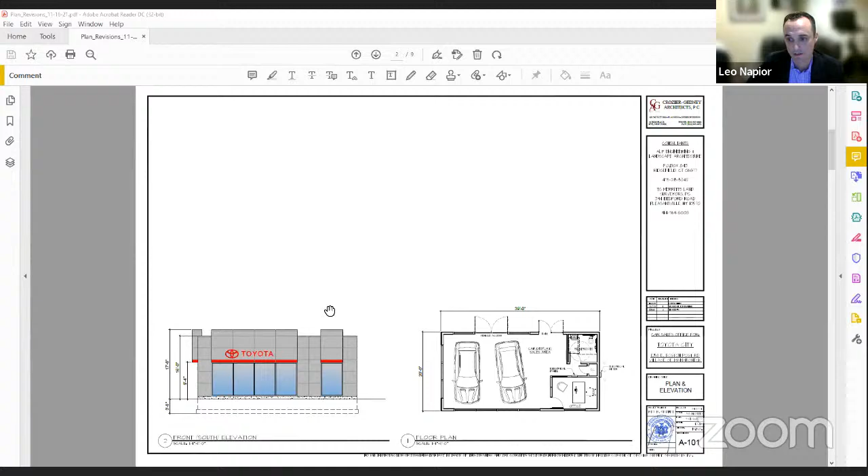So the concept for the building is to look somewhat similar to the Toyota City main facility across the street. As I mentioned on the site plan, the utility connections were shown. The customer parking spaces would be designated here. We also provided details on the hours of operation, which would be 9 to 6 Monday to Saturday, and 11 to 5 on Sundays.

And I think the final piece the board had a question on, which I wasn't able to get more details for, was on the light fixtures themselves. The idea would be to have similar fixtures to those in use across the street at the main Toyota facility lot, and they would be on photo cells, so essentially they go on at dusk and off at dawn. I think that was all the questions the board had. I'm happy to address any further questions.

Now, the cars here, this will be mostly used cars, is that correct? It will be a mix of new and used, yes, there will be a combination of the two. Will you be doing any leasing, contracts, leasing of cars on the lot? Yes, I mean, I would imagine, I haven't had that conversation, but I would imagine it would be both sales and leasing. That's fairly typical.

Yeah, that's a permitted use. It's actually the way the code describes motor dealerships, it's buying, selling, but renting of cars. So we would have to say that you also have, are these renting or are these more leasing? What's the difference between renting and leasing? Renting implies a short-term, daily, weekly, possibly monthly. Leasing would be over usually a period of one year to three years. I'd say a lease is a rental contract with an option to purchase at the end, so it almost, in a way, is a sales contract with the trade-in value. Yeah, I don't have a problem with that, I just wanted to call out that you would be doing leasing.

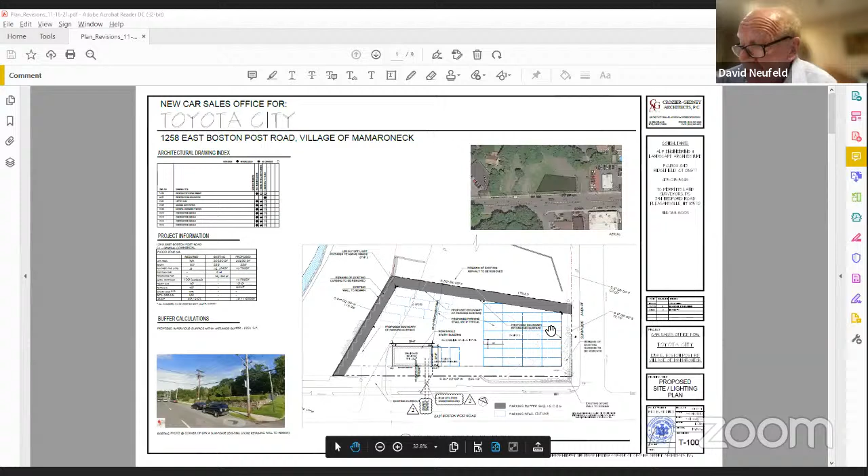Yeah, I see that, I have the plan. What about on the Post Road side? There's a retaining wall there, so there's the lot wall. It's elevated, and I can just flip.

There's going to be some significant plant material based on the village's planning landscape consultant. They had comments about adding in some street trees, so we have those proposed along the street here. There will be a curb installed between what's essentially the upland of the other lot, lower down here, and then there would be new curbing and new plant material planted along the back edge.

This is all entirely flat right now. The existing rubble asphalt extends out into this residential lot, so we're cutting ourselves off from that residential lot. Right, where you have the pointer now, that's going to be like a 2-foot grassy swale, I think you said?

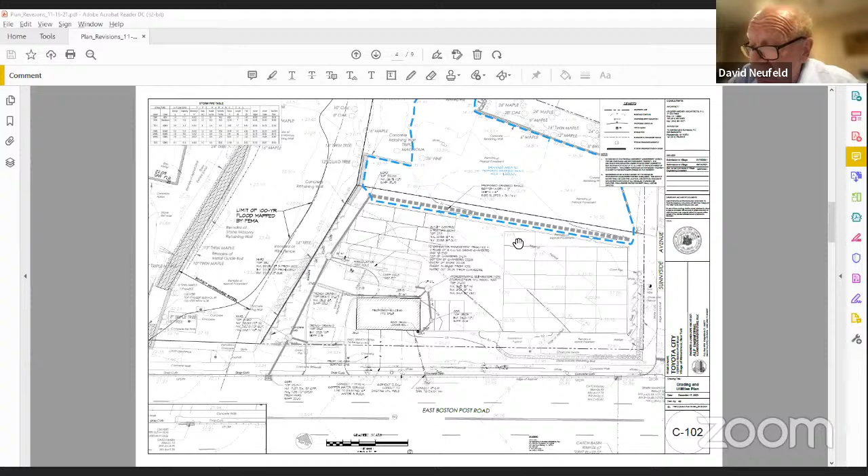Yes. Okay, but the problem I see then is if you're going to make those 7 spots for customer parking, how are you going to get the other cars in or out and move them about? Well, so there would have to be some car jockeying.

I could be wrong, and I'm sure the applicant hopes I'm wrong, but I would think it would be very unlikely that all 10 of these spaces, given the small size of the lot and the small size of the building, would be occupied that often. But that would be no different than if there were no customers parked here—if every one of these 10 spots was full of a car and they needed to get one out, they'd have to move the cars around it.

Unless you could put those 7 spots behind another location, like behind the 2 that you have, coming in this way—because what I'm saying is you're going to have a problem. Your storage area there, basically the only way it can get in or out would be using the Sunnyside Avenue cut.

Sunnyside is not meant to be an active curb cut. There's an existing curb cut there now that's going to be gated and closed off, and actually planted over. It's being left there simply because we're the tenant on the property, not the owner. So to the extent the owner at some point wants to do anything with the adjacent lot, and they already have an existing curb cut there, we just didn't want to touch it. But the intent is to have that as emergency access only.

Well, is there a reason you can't go behind the building, a little where you are now—you have those 2, and do the other ones, the 7, vertically or horizontally coming in there, and that lets you... go back to the 2 that you have now. You're saying stack them up here? No, to the right—there you go.

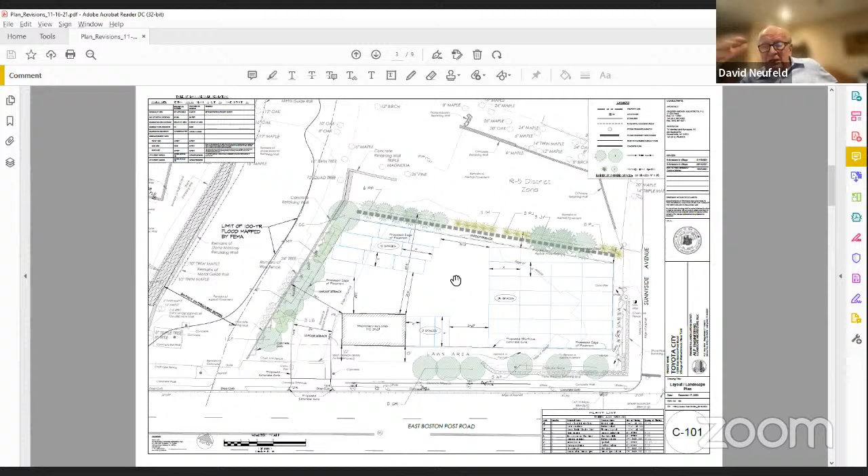Can't be both, right? So I don't necessarily have an issue with them being considered together, other than obviously it costs the applicant a month.

I guess the only question is, am I opening up - I'm not aware, I don't want to start talking about operations on the other properties and driveway layouts and parking layouts that have already been, in theory, permitted and approved and in operation for some time. I just don't want to open up a whole can of worms that sends me down a rabbit hole. I don't think you need a site plan review for an extension of the business, you'd need a site plan for new construction.

The problem you might be opening up, candidly, is that the other side seems to have taken the parking area and is using it now for storage of vehicles. I've been there on occasion, took my kids there in the past, and always had to park somewhere down the street on the Boston Post Road. But I noticed the parking lot now - I don't know, but you may want to think about this.

Obviously, if it all complies, it would be very easy to amend it. It would give you more flexibility for operations. I have a problem conceptually with the idea of treating it separately - I have no problem with that, but treating it separately when it's not separate. I think it's fair to say it's probably not going to operate separately because of the interplay between them. I don't know what other members of the board feel.

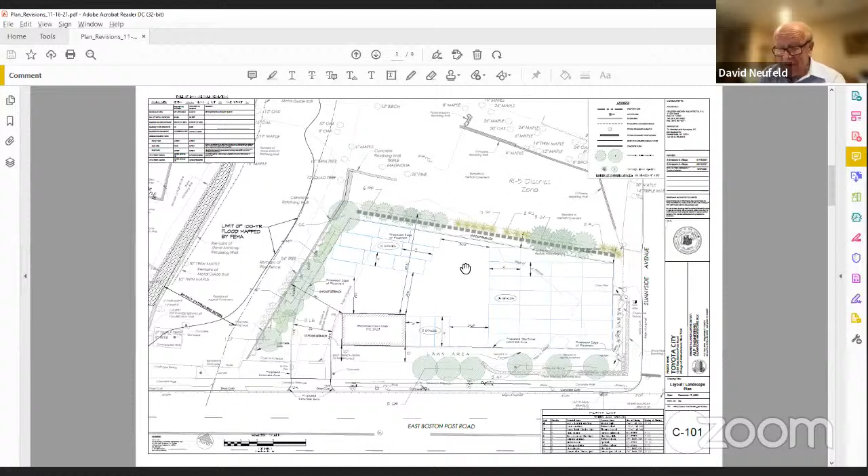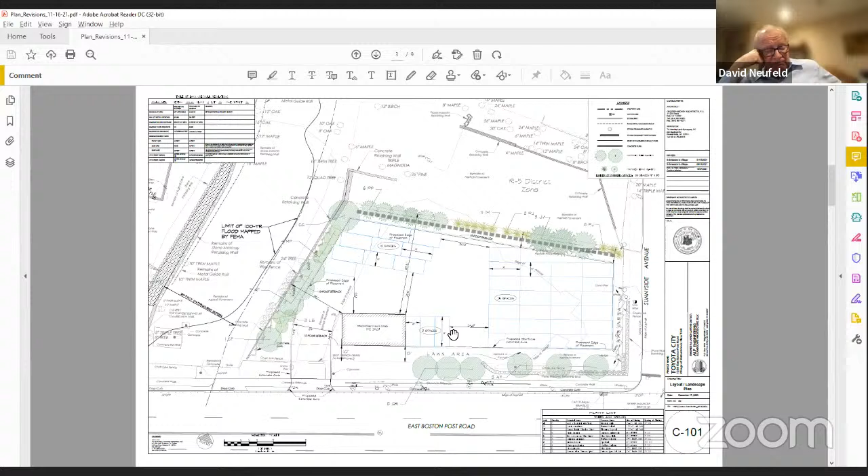I see a special permit for 2015 for 3 years, so it would have expired sometime in 2018. We could look it up and find it. One of the things we can do is let the applicant take a look at it and make a decision, and come back.

How do members feel about that? I think that makes sense. I agree. Otherwise we're just sort of throwing it against the wall. I don't know, otherwise we're sort of disregarding what the code actually says.

Sorry, somebody's rubbing a mic someplace. Otherwise we're disregarding the code. We know they're not going to comply with the code. There's going to be an interplay. It doesn't seem like such a big deal. Do we really want to do that or not?

Chair, board, that's the question I was asking earlier. Looking at this application, I don't see if it's together, apart, or a satellite — if they're purchasing used vehicles on one side of the street and selling at this other business that belongs to them as well. Are both of these agencies sharing the same name? Is it Toyota City as well, or Toyota City A and B? Is there a difference in the name of the business? There's a lot of questions that I have.

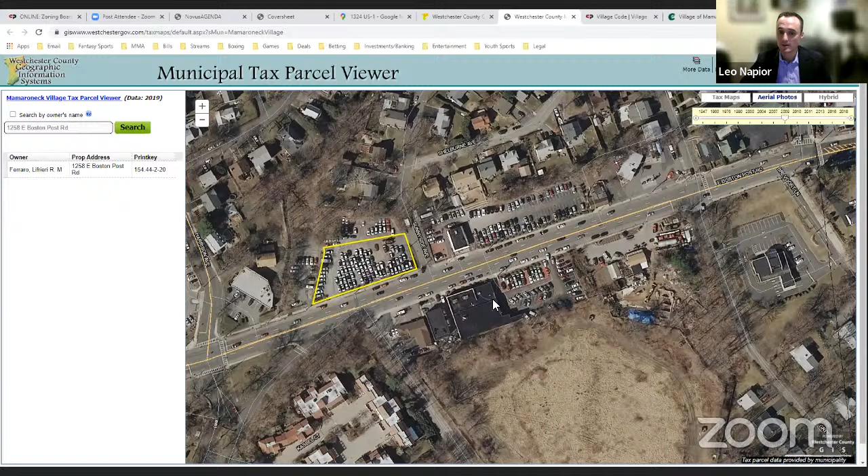It was being used for vehicle storage at that time. I realize that, and there was an issue with that, but I'm saying, did it ever get legalized or a permit issued there? No, that's why we're here before you now. It was used this way for years up until they came in to ask for the showroom permits, and at that point in time, it was realized.

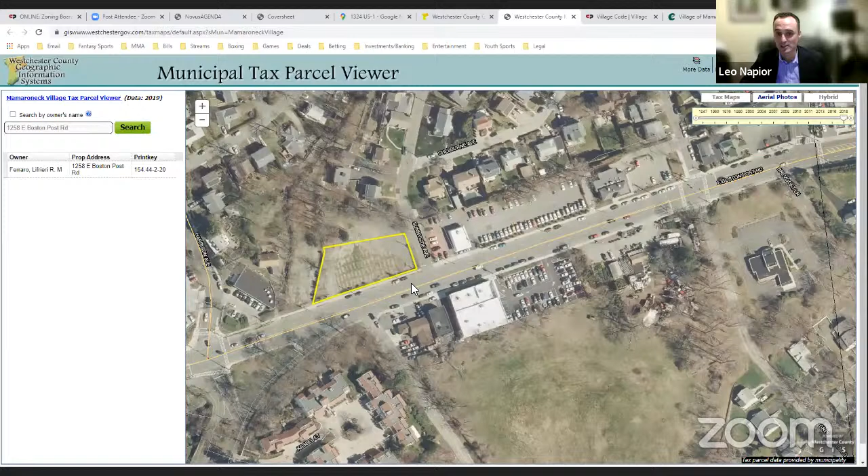It's now empty, Dave. It's not this way anymore. There's no cars on it. Yes, this is it today. Okay. Or in 2018, but also today.

My question was regarding the lot which currently does have a building and cars on it, acting as a car sales agency. Just, I don't know what direction that is, but it's on the same side of the street. It's where the pointer is now. And does that have a special permit?

Brittany, you couldn't find that one, right? All right, so my suggestion is, I don't know what the board feels, let's all talk about it for a second. I think this is, you got a compliance and a sprawl issue here, and the issue is, what do they want, and then how do we make it so that it gets corrected properly? Because by doing this separately, it's becoming more and more complicated.

So right now, the two lots that are in operation now, are cars crossed over, or used cars from one lot brought over to the other lot, or vice versa? Do you know? I'm not aware. I do know just from the signage on the building, there's arrows that say new cars this way, used cars this way, but aside from that, I'm not sure how the two interrelate.

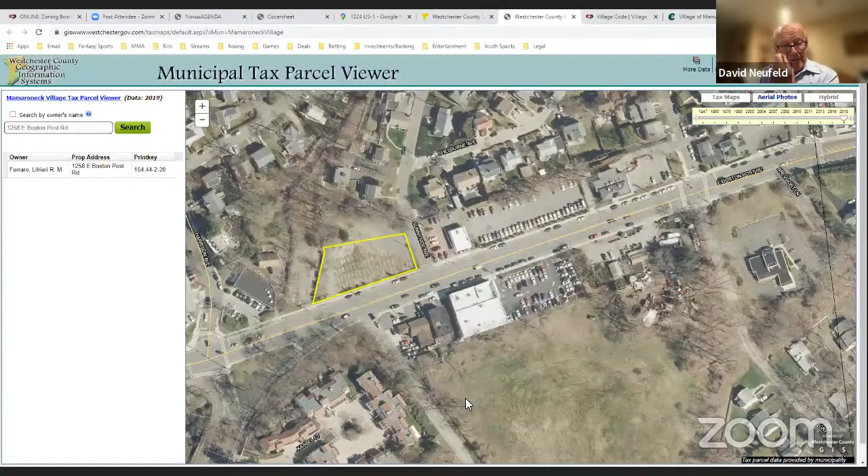I think at least I would favor the idea that this has all got to be properly made compliant so that, and I think you're operating them together, and I think you've just got to get that dealt with properly so that everything has the appropriate permits.

All right, everyone else want to put this off then? Anyone object? Ron, Meg? Okay, Greta? All right, so we'll put this on for January. We'll carry it forward. Why don't you try to move? I know it's a tough month to move forward on these things, but if you could try to do it, and maybe Charlie, if you could follow with them, or if they have any questions, they can ask you. But it would be nice to be able to get this organized because they want to move on it quickly.

And then the next matter, my paper's at 533 Claflin Avenue, the continued public hearing on that.

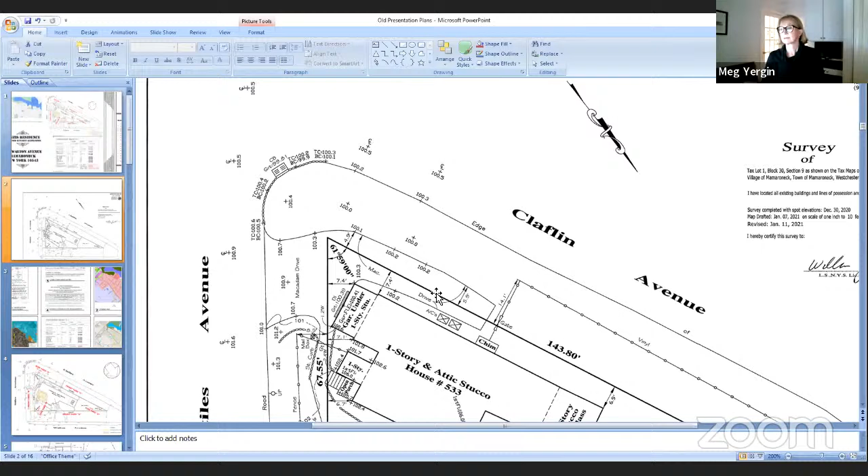And that's where you can see the stair is literally encroaching onto the right of way. So our proposal is to bring that stair around into the front yard, back onto the property. Okay, can you show us the site plan with the new proposal?

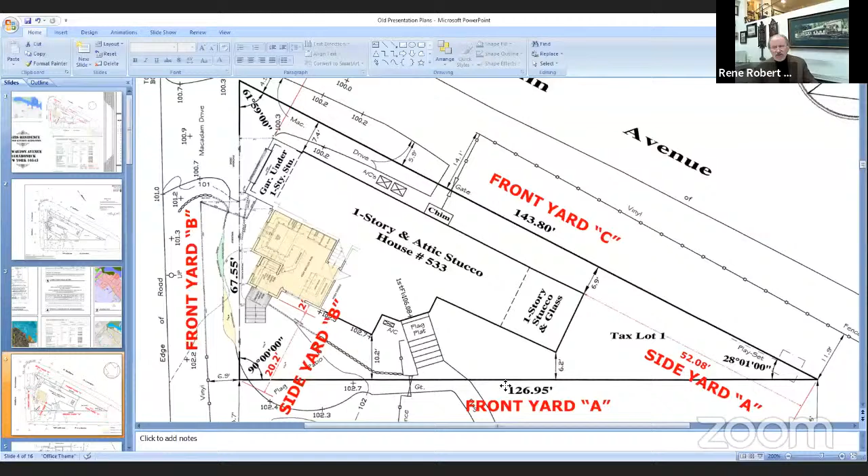Right here, you see that? Is your property line ending over there on that edge? That's the property line here and here. What's the rectangle, what's the other part where it says front yard B? Directly under the front yard? Isn't that your property as well, the 67.55 by... I'm looking at something that I picked up, and it has front yard and side yard, but I'm looking at something here that says...

This is the old drawing version. Yeah, that's the old version - he was showing us the old drawing. The new version is this one here. Here you see the new version. Okay, now we can't see it again. Click back to the new version. If you go back to the old one, we'll disregard what you called forward, front and side, and we can just look at where the stairs were placed.

Okay, let's go to the old version here. Can you see that? No. There you go, we go. Okay so...

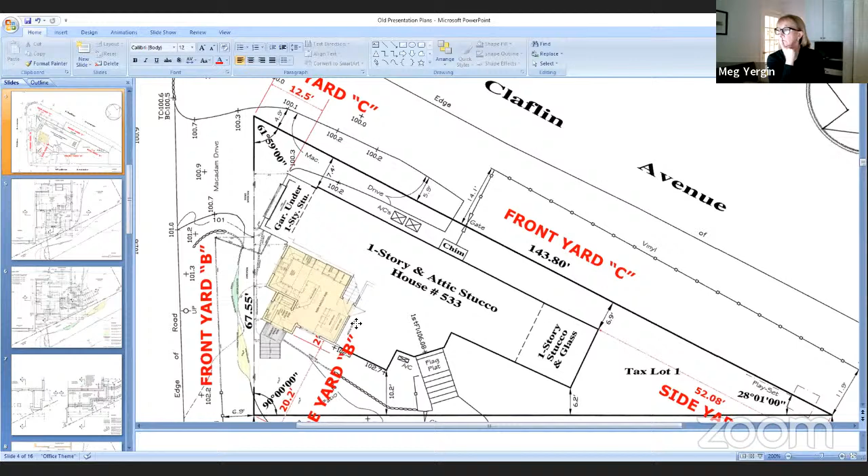Front yard B is now side yard B - the front yard C here and the front yard B, these are where the front yard is at. That's where we defined this stair in our new amended definition, considering this the front yard and this the side yard. Listen, they pulled the staircase off of the property line and put it in the front yard - from here it's currently running this way, yes.

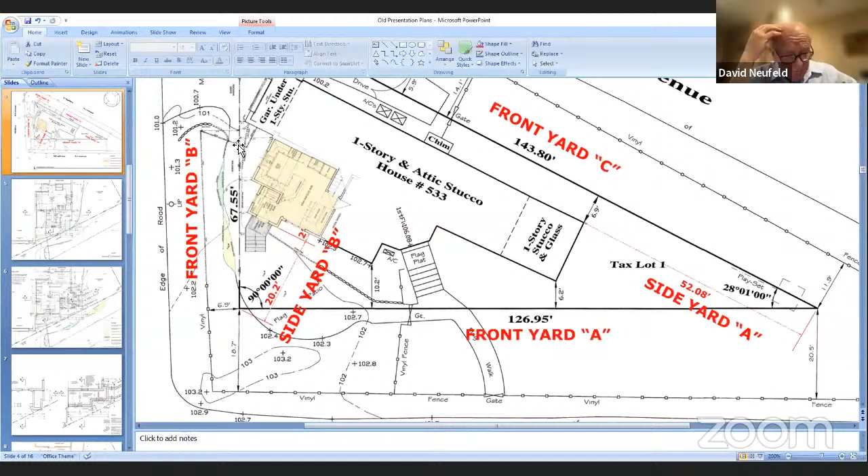Where is the fence though? There's a fence on that side of the street. Yeah, the fence is here. So what I'm saying is you really have that property - I mean, I don't know your deed or your title, but you've effectively gone out into that area. That's currently the case. And what makes you think that you don't own that area?

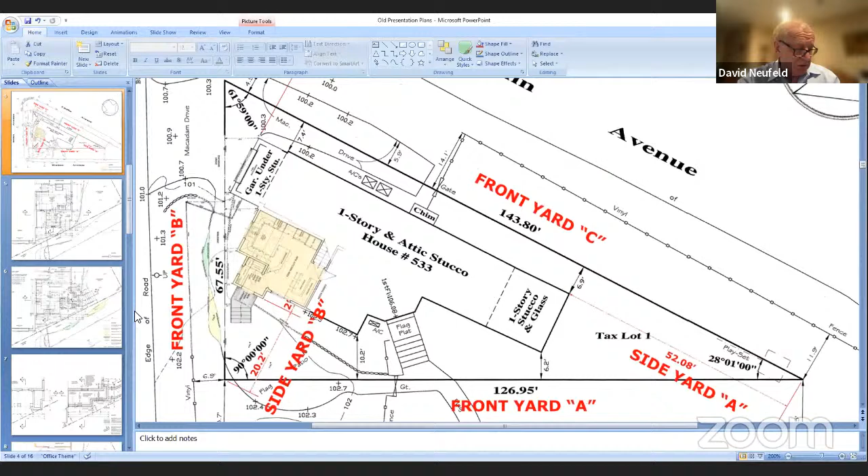Do we have a survey here? That's the survey plan. No, I don't think that's a stamped survey - this is a proposed site plan with yard designations. There's nothing here that says this is a survey, there's no surveyor seal. I can bring you back to the survey, let me try that. Thank you. Fingers crossed, we're gonna get to see it. Yeah, because the land that's outside where they walk, where the steps went onto, was inside the fenced area.

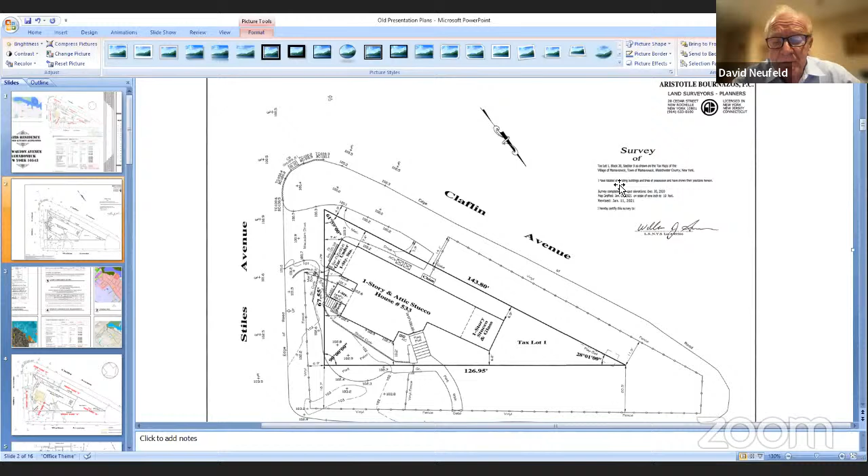Okay, here we go, that's the survey. Let me reduce it so you can see. Let's see the survey reading. Let's bring that up a little closer if we could, please. Okay, good.

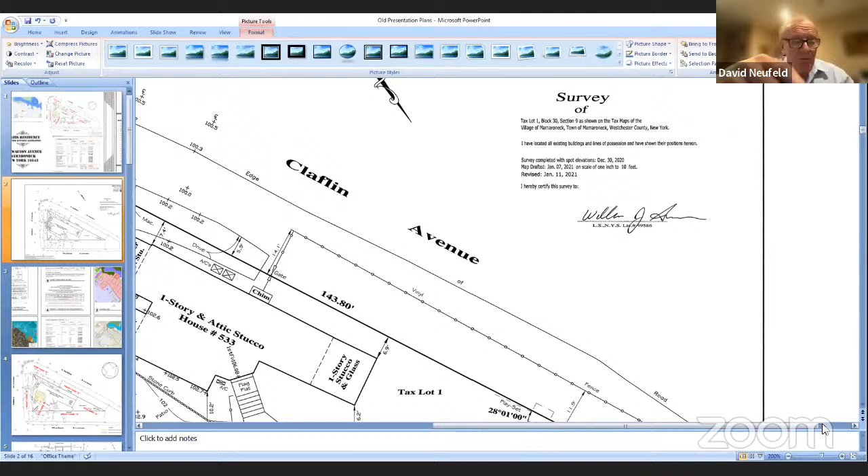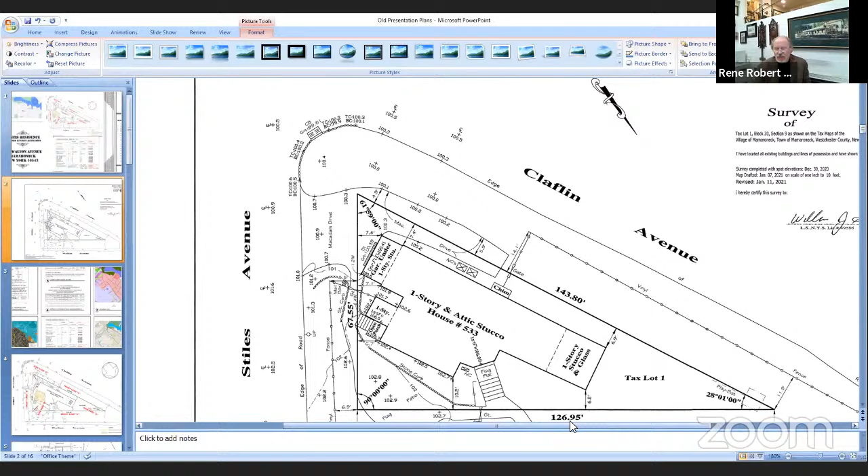All right, so here's my question. I see a survey here, but I can't tell from looking at what I'm seeing where the boundary of the property is. You've got several boundary lines. The heavy set line, the 143.80, that's the line along Claflin Avenue. The 67.55 is along Stiles Avenue, and the 126.95 is along Walton Avenue.

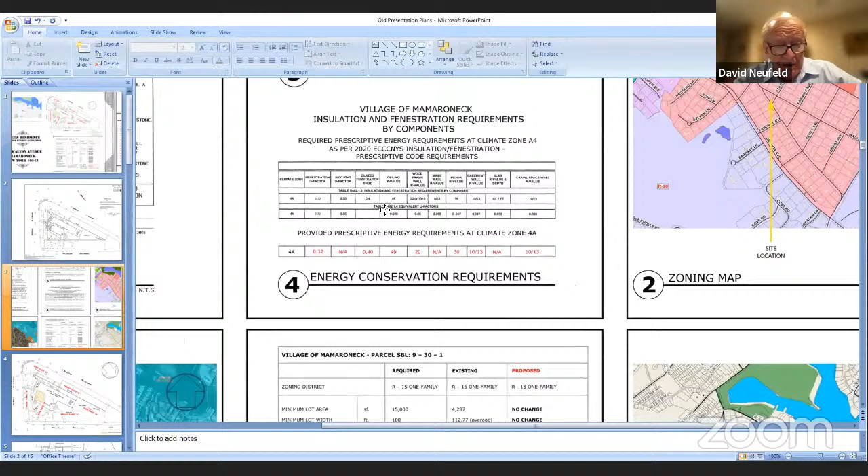So there's 14 feet that goes out towards Claflin from the property. You've got that fenced in, that's the fence out here, right, and on Claflin as well, on Stiles and on Claflin. What I'm saying is, you've always been using that property, Brian, you were asking about where it went, but they've always been using that property and fenced it in.

That's why I was surprised. You're talking about the fence here, right? Yeah, I'm talking about the fence there. When you walk by this property, the fencing all around, what you're suggesting, and I'm very surprised by this, is that the fencing shows the property is significantly smaller than the area used by the property, correct?

The fence is literally 20 feet out from the property line here, and 11 feet on that side. Yeah, but you probably have about 15. My guess is you've got more than 25% of this property as depicted on this outside of the property line, assuming that's the case, and it's used by the property.

This is all grassland. No, it's property though, that's used by this property exclusively, it's fenced in. That's why, I walk by this property regularly and I always thought it was the property. What this is showing me is, if you take a look at the Walton side, it's like 20 feet from the property line out. It's not the property.

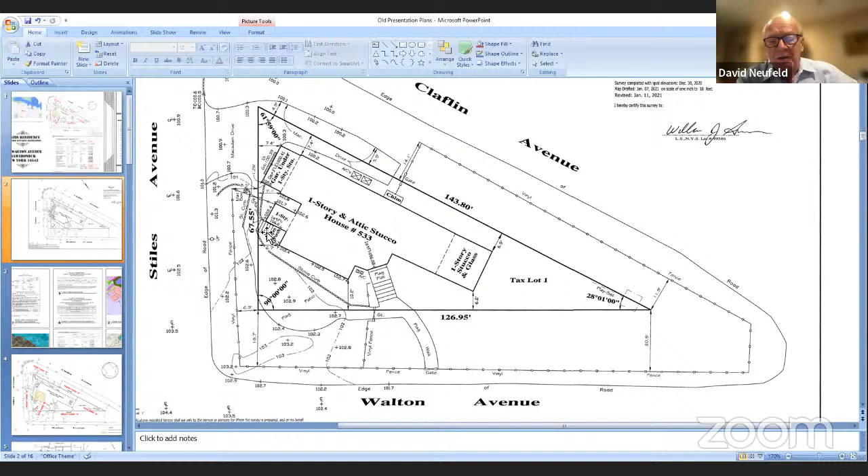I think it does. It looks like what you have are pathways and you set up a fence for sure, but otherwise you've built, this house is built within the lot lines. Yes sir. Could you drop this survey so I can see that legend above the signature of the surveyor? Yeah, and then drop it down a little bit, just let me just, okay good.

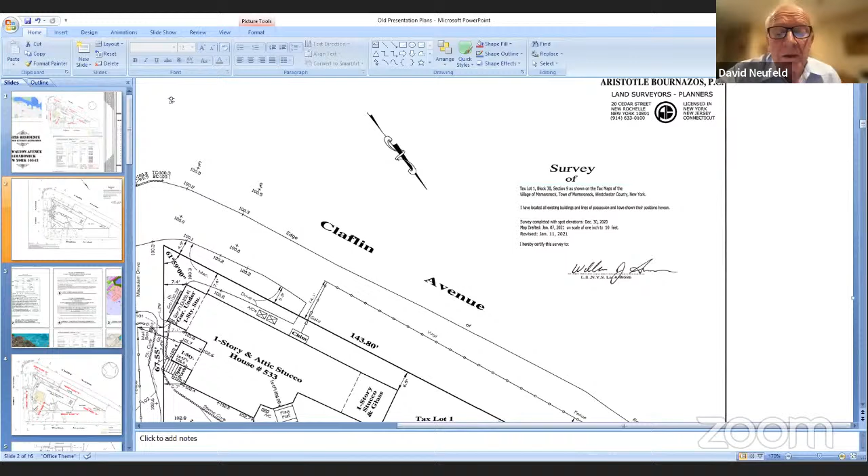Okay stop, that's it, can you enlarge that? All right, move it over a little bit so we can see that please. Got it, here you go, it's a survey of.

Survey completed with spot elevations, December 30th. When is that? 2020, it's 2020. And then it says revised 2021. Revised, yes. Usually on a survey you would see a line that has property line, this is.

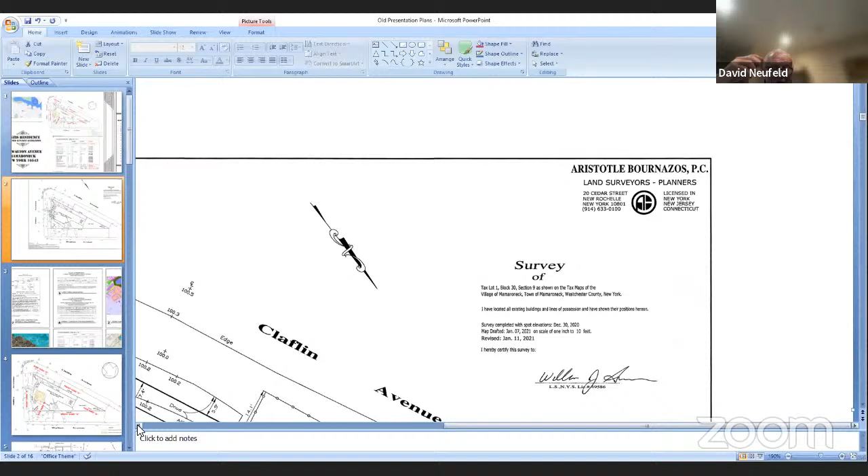All right. I mean, it certainly is a unique property and it's becoming more and more unique as we look at it.

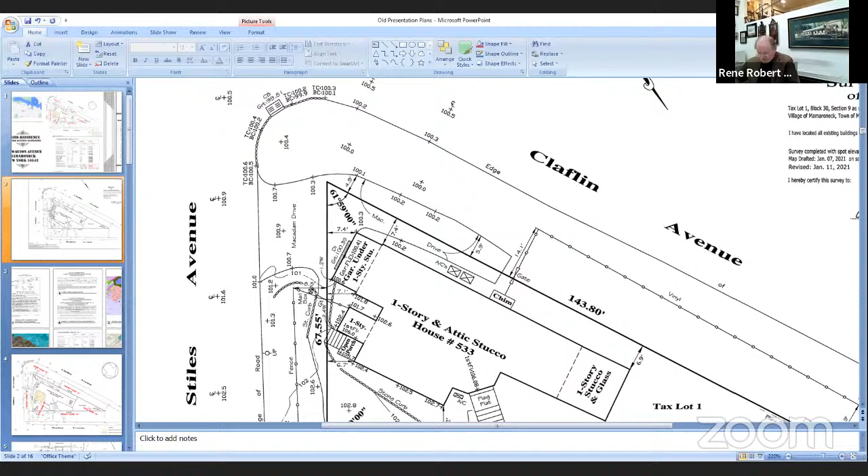These people just buy the house recently? No, they own the house for quite a while. They bought the house, I can tell you this in a second. They bought the house in 2016, in May 3rd. So that's 5 years.

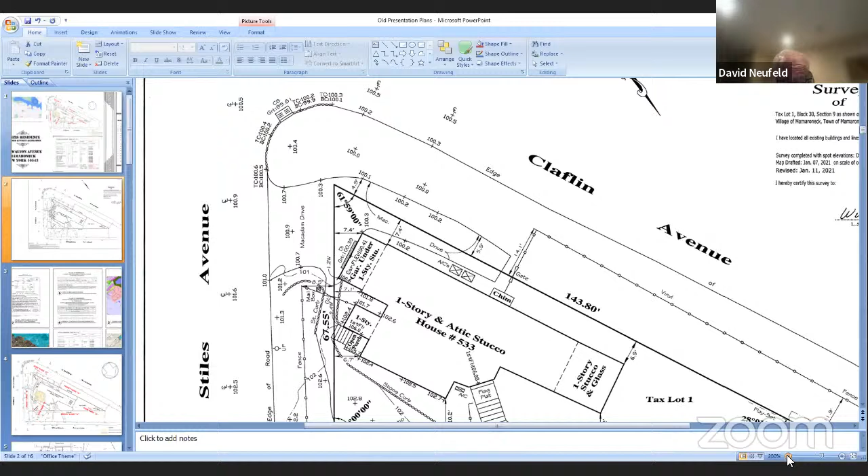All right, they use it and that's the end of that, it is what it is. I think they're talking about a variance for coverage, building within the lot line, not interfering with any of this other property we're recognizing. Turning the stairs is staying within the lot line, so the question is what is the square footage, because it's right up alongside its lot line. Is it increasing the square footage within that required yard? If it is, then I believe it needs a variance. It looks like it's behind a fence and way back from the street line, so I don't know that we would have a problem, but I think it rightfully requires a variance because it's an increase in the nonconformity.

In addition, I'd like to know whether or not it's 5 feet from that lot line, because if it's not, you'll need a variance for that as well. That's what I'm saying, the house is already within the required yard, so it's already pre-existing non-conforming. It would be an increase in the pre-existing non-conformity. So where would the increase of the nonconformity be then? Because the stairs, I believe the landing gets bigger and there's more square footage running along it than what exists now, when it's turned and the landing is larger and the stairs are a bit longer.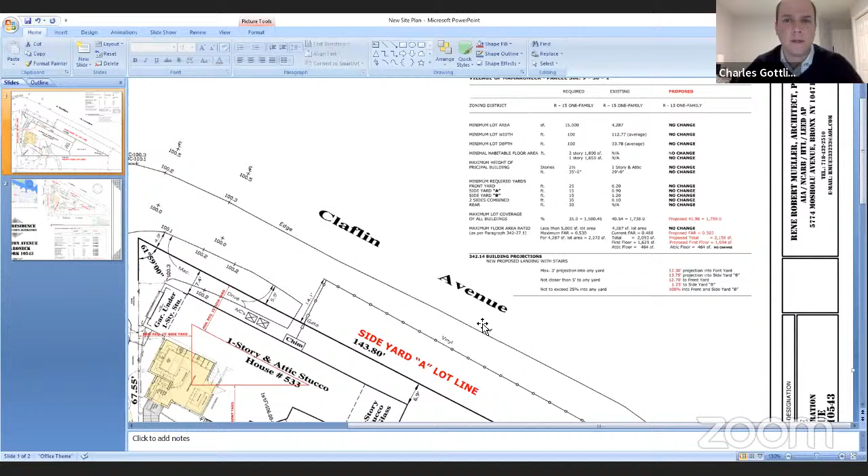I might be a little confused, but one question I have is, and Meg, this is to your point, that the stairs aren't a projection. So are we looking at the right code section for the variances, considering this is not a projection? Well, if we considered it a structural extension of the building, it doesn't comply with what's described as projections. Is that possible, Charlie, to consider it part of the building? Yeah, it's a question that just struck me as I was reviewing the plans.

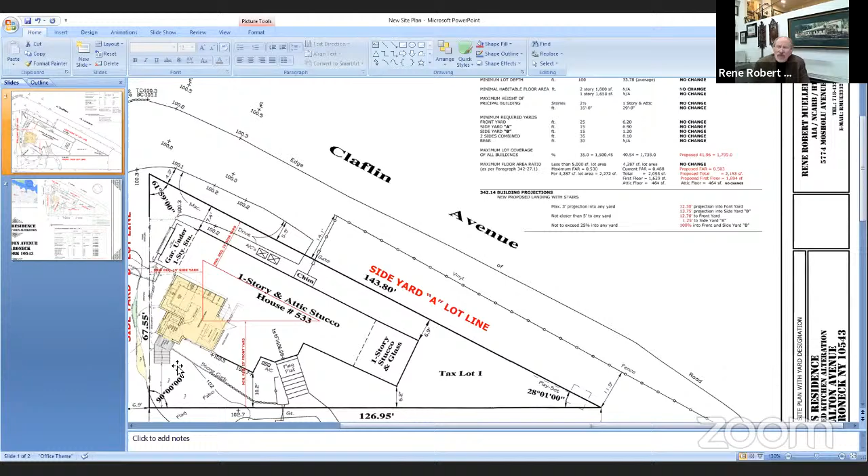Well, the landing, which is next to the kitchen, is that covered or not covered? Uncovered. The gray area, which is the stair we're talking about, is not covered. So its only purpose is you walk up the stairs and then have that platform, and that's all before you go into the house. Exactly. So it's not considered square footage for the house at all. No, not covered, so I wouldn't... I'm sorry, go ahead, I was thinking that might be a projection.

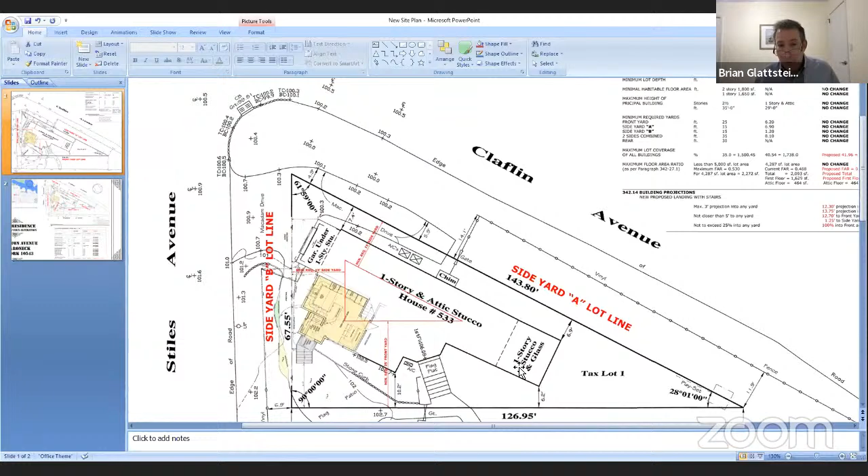It's too large, it's not how it's built. I think it's the side. Or are you saying it's a really big projection? I'm saying it's a really big projection because it doesn't have a roof. It won't count as floor area ratio for the house. It's just something somebody utilizes to get up into the house, the whole thing.

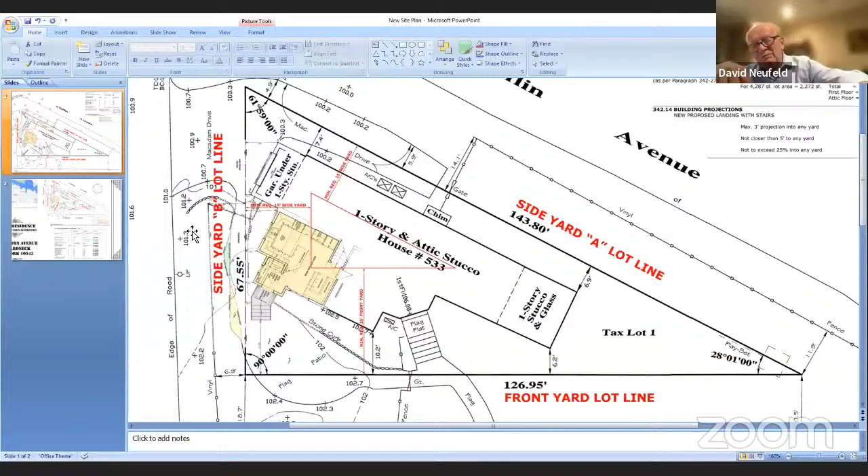Could you show us again, the slide where we see the stairs as they are now? By the way, if you look at a visual of this property, it looks like you own all of the property. That's the interesting thing here, the visual is completely different because the fencing is out by the road.

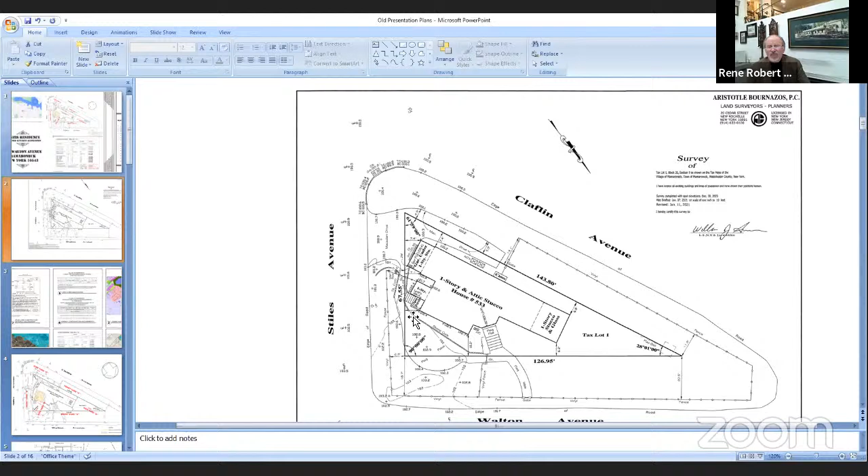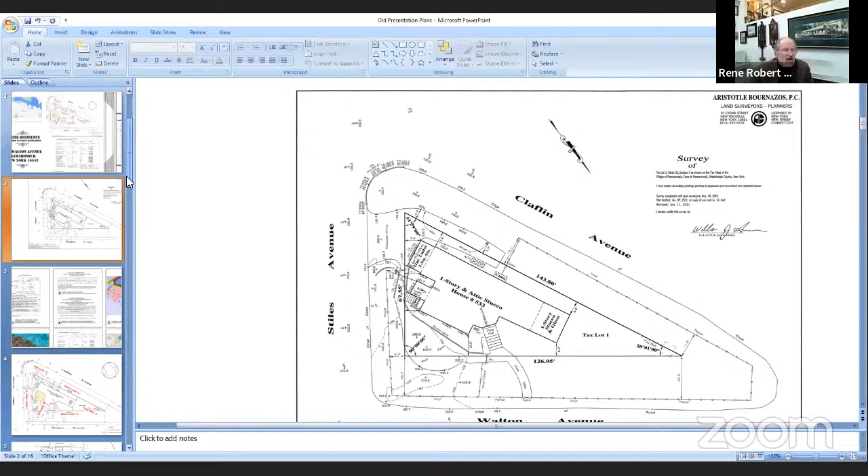Is it essential to the plans that you rejigger the stairs? Is there any way... can you see that, you're filling in that space, is that correct? That space here, or which one? Sorry, where the stairs are now, as they are. Okay, let me show you, I have an overlay. It's probably right here, can you see that? Yeah, okay, here you can literally see this is the side yard now, and the brown line is what's currently there. Okay, that's the exterior.

That's currently the stair leading up to the kitchen. What we are proposing is filling that in this way and bringing this entry area out, and the new stair landing would go, indicated in blue there, okay? It just seems like if you had the door stay where it was and brought the steps back a little bit, not putting in the new stair, you wouldn't need another variance, just the one you actually noticed and applied for. Yeah, but otherwise, in my mind, we need to decide if the variance is required for the extra large projection, or more simply, it's an extension of the building and the non-conforming yard of the building.

That's current, I think it has to be renoticed.

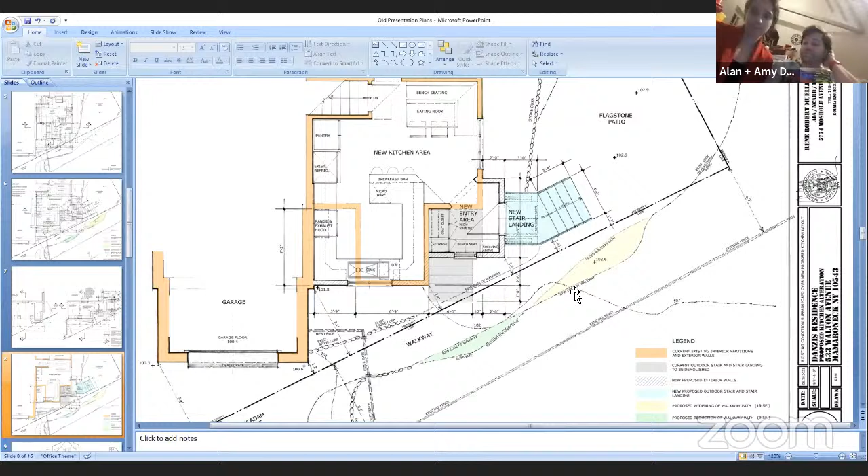How does everybody else feel? They got the property, what, 2019? No, in 2016. May 10th, 2016. May 3rd, 2016. Just trying to see a deed.

Chair, while you're looking for that info, if I may ask a question, do you have an elevation of that rear patio? And is there a step, once you open that door, or when you come out of that door, is there a step down onto that landing, or is it level?

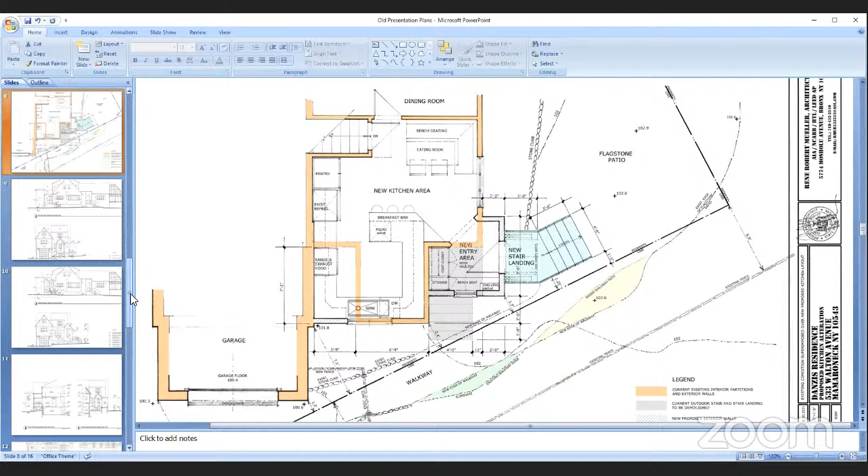The direction I was going with that is if there was a formal step going onto that landing, with an 8-inch drop there, which the code allows, going onto that 3-foot area, you would be able to eliminate a step, and then that would be 3 steps instead of 4. You can see what's proposed.

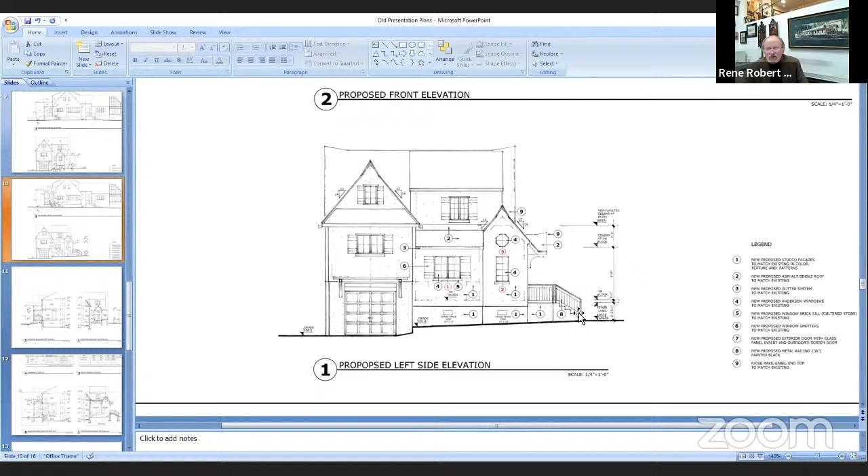Oh sorry, yeah, it's the proposed section. All right, I think there's 5 stairs. Let's see here: 1, 2, 3, 4, 5, and then a threshold. Oh yeah, 5, yeah.

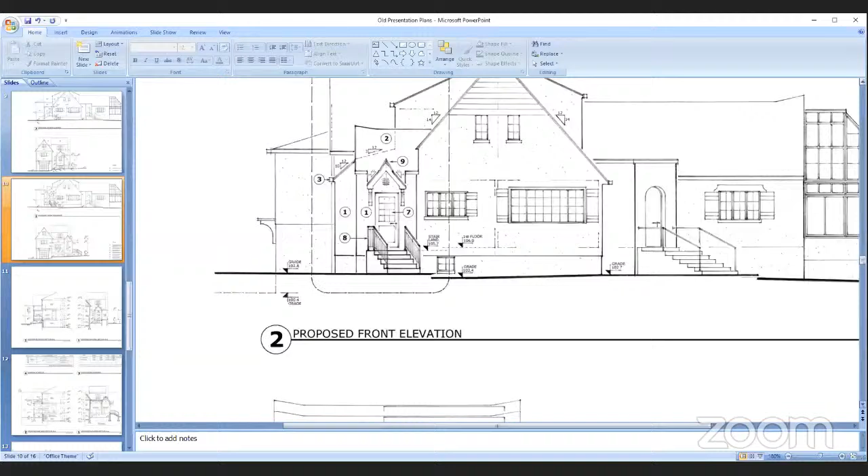So just a couple comments from me. If we have 5 steps, right, I like the idea - I don't know if you want to take this into the record - but I like that the projection of the stair is no longer over the lot line, and we are turning it into the yard. So that's a plus for me right away.

And then as for the amount of stairs, if potentially by design the architect approves dropping the level of the platform of the deck, or porch, down another 4 inches, that would change the elevation of the stairs. And if he's to raise the grade in the area of where that step was, to eliminate one more step and a half, he would bring it down to 3 steps of a projection going into that yard.

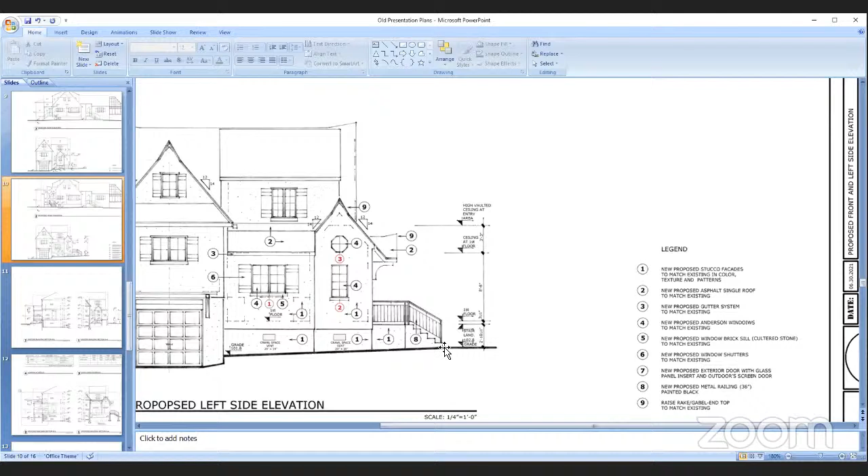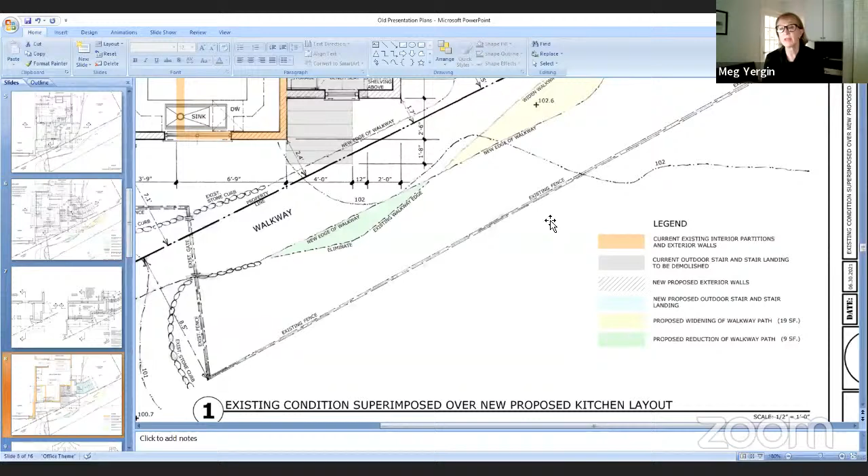Can be done, yes, but that would not save you from the addition being so close to the property line. But you would still need the variance for that, obviously. Right, well, because it's a projection now, that's just the 3 feet, so it's considered a projection, so it doesn't carry the same weight when it goes into a required yard. Charlie, is that correct? If it was a true projection, you're permitted to do that in a required yard, but even if you do the stepping as you suggested.

Dennis, can you hear? You're not talking because it's a little noisy. Very nice. Yeah, I'm in the quietest room you could ever be in. It's not me.

But Charlie, if it's just 3 steps, so it complies with the definition of projection, which are allowed in minimum required yards, then it would not need a variance for the addition of a landing and 3 steps. Is that correct? So if it's classified as a projection, reading from 342.14a, it says it shall not project more than 3 feet into any required yard, but not closer than 5 feet to a property line. And the sum of the total projections in any one yard shall not exceed 25%. So even if you classify it as a projection, you still need to meet those dimensional requirements.

Okay, well, it seems like there's no way to get around the fact that they need a variance. Right, most probably would not be opposed to granting it, but I think we keep looking at this and they need a variance.

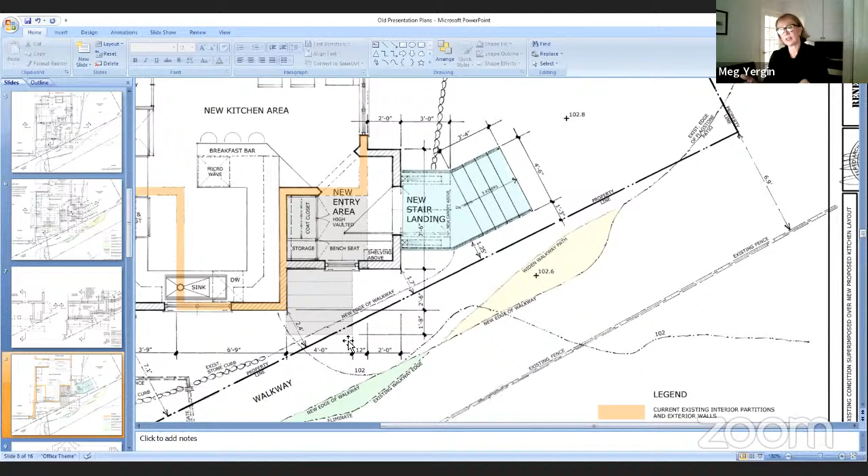But I would say that the letter of determination from the building department did not point this out, and they could only come to us if the building department had told them they required it. So I don't think they should have to pay for it. I think this is a miss on the village's part. I do think they need to renotice and come back, but I think the cost of this should be absorbed by the village.

Well, okay. Yeah, Charlie, there's a provision of the village law that indicates that when the board hears a matter, it can do what should have been done. I don't have it in front of me, but it's Article 7 of the village law, New York law.

I'm just thinking, if there's not, then they've got to come back and notice this for a variance, an area variance, right? But Meg makes a very good point, they couldn't have come in here for an area variance since they had not been denied because of it, right? Well, it's perfectly within your ZBA jurisdiction to require a variance if it was missed by the original building determination. That's no problem.

But under that section of law, we can't do it without requiring a notice, is that the idea? I just remember there was a section that talked about that, but I can't think of it off the top of my head. I can look into it, but generally, if a variance has been noticed and you're adding a totally new variance, it needs to be renoticed. Similarly, if you increase the size of a variance and those dimensions were included in the notice, you should also renotice that.

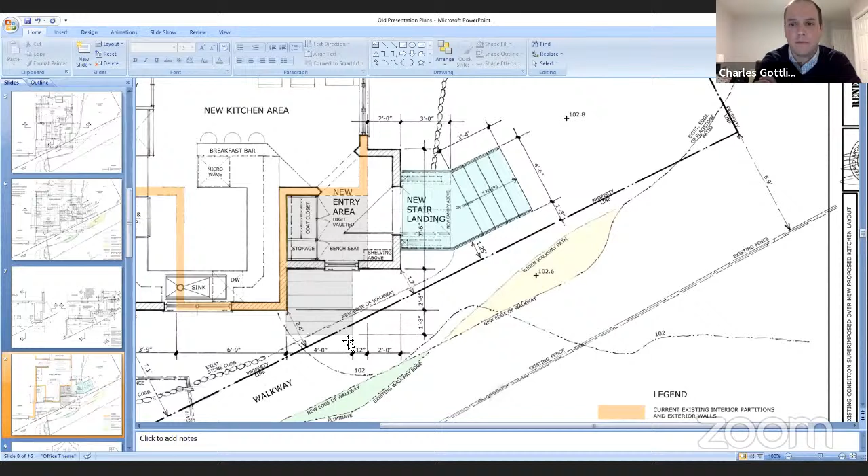Yeah, I think that works well. I mean, that doesn't mean just for the applicant, I want you to understand that. We haven't discussed the other variance. I don't have a problem with the other variance either, about the additional coverage, that seems fairly minor. I just want the applicant to understand that's just how we're approaching it. That doesn't mean it's been voted on, and it doesn't mean we've approved it, but we're trying to find a way to bring it back expeditiously.

May I ask you a question? The request variances, the new ones, are they based on what I already have projected here on the proposed landing with the stairs, the building projections, the yardage setbacks, and chapter 342, section 14? Is that the fact? Is it what I already described a little bit? Is that the way we go?

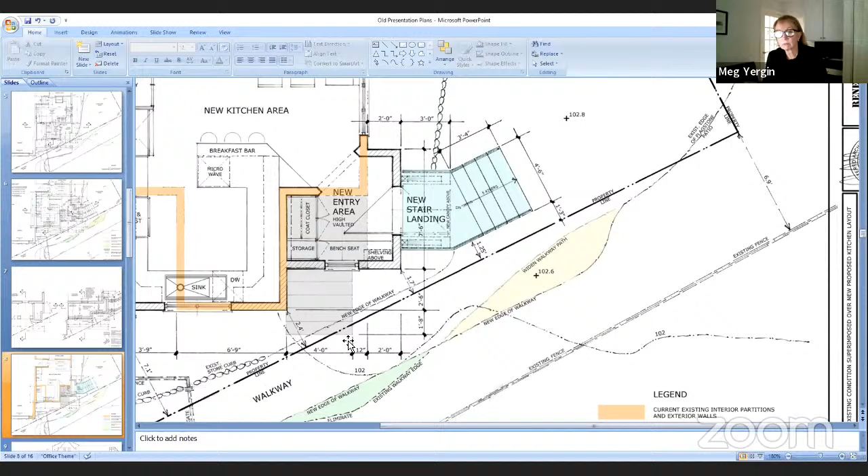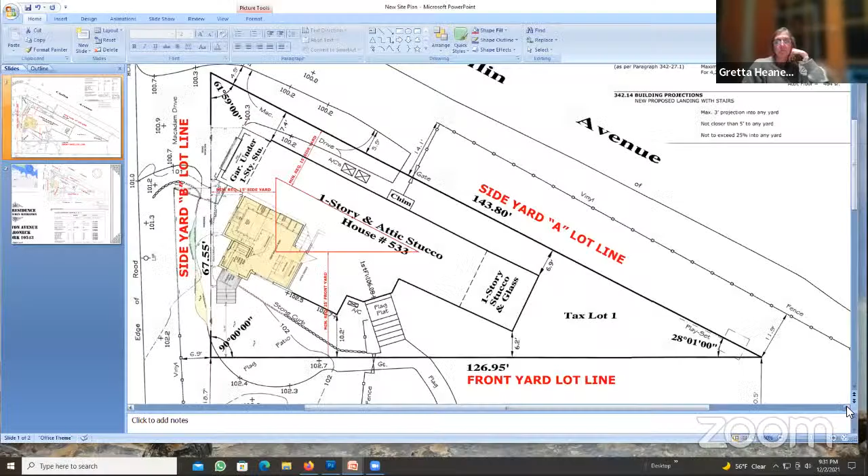So I know how to describe the variance, so I'm on the right track. That's correct to say it's an oversized projection, based on section, in the side yard. And you have a side yard with you, right? If I may just go back to my original thing here a second, right here, basically along that line - that would be the new variance description.

I guess I have a question for Dennis. So Dennis, if they keep the stairs as is, would this take it out of the realm of being a projection, and then therefore you just apply the front yard and side yard setbacks to the structure, to the stairs?

Sorry, one more time with the question? So if they, as they have it planned now, because it has more than 3 stairs, would the building department classify this as part of the structure, and therefore the 342.14 for projections doesn't apply, and we would simply apply the front yard and side yard setbacks?

Okay, so it is a structure. The stairs will work both ways - it's a projection, but at the end of the day it's always a structure. So in the way it's drawn right now, I would prefer the layout to be like this with those 5 steps. If they choose to go with what I suggested, I'm fine with that as well.

And if you approve this or don't approve it, we're going to have a workaround anyway, so they'll figure it out. So it's really up to the board's decision of what they choose to do.

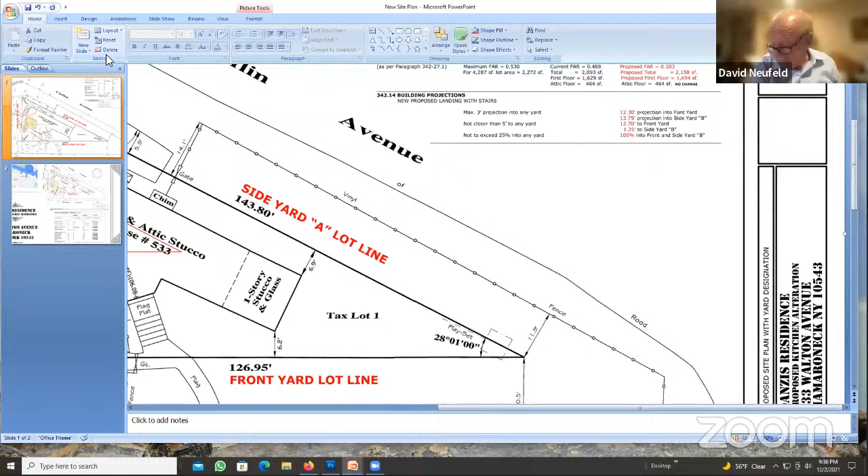I think we can arrange for you not to pay another filing fee because of the amendment. I think that could be done without a problem. Granting that is kind of outside of my purview, but I would direct you to the village manager to have that discussion.

Brittany, maybe you understand the issue. I think we could speak to the building department and the village manager and explain the mailings and the application fee. I think the application fee would be null, but the mailings I'm not sure of. Do we charge for amending an application? I don't believe we do. I don't think there's a charge for that.

Not that I'm aware of. It's a different variance, a separate variance, but it's a pending application that amends. We often will amend it or add something to it. So there might not even be a fee, it would just be the mailing cost potentially, but we could bring that up to everybody involved.

Well, okay, thank you Brittany. No problem, I will be in touch with the owners. I would suggest to the applicant that sometimes, depending on what's involved dollar-wise, you may be better off just moving forward, because if you ask for something you may get an answer you don't want, but that's up to you. I don't think there should be a charge for amending an application, I don't think we've ever charged for that when we've pointed out something.

Okay, so we're going to adjourn this till the next meeting. I would just press upon the applicant the timing involved, because you have to have this application in by a certain date. Do we know when this has to be in by? I have to check the dates for 2022, we were just posting those, so I will check and let you know.

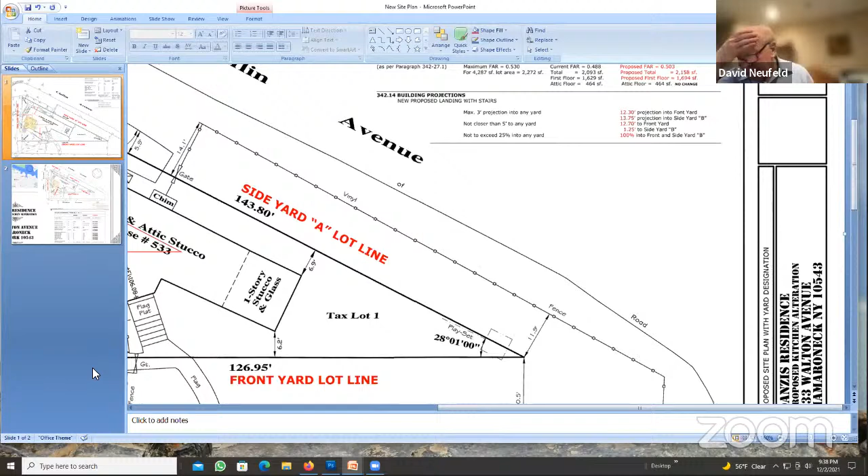Okay, so we'll put this over, and we understand that the applicant will be amending to include the other variance that we've noted, was not noted before, but it is noted now, and it'll be addressed. All right, thank you, sir.

Let's- okay, just a moment. All right, does anyone want a break, or do you want to continue right through? Let's keep going, because I think we left Mr. Noto. Next one is 544, 432, and 442 Waverly Avenue.

Let's see. Who's this? This is Paul Noto, I believe. Hi Paul, how are you? Good evening, how are you Dave? Good to see you again. Oh good, I can't see everybody. Nice to be back. I can't even see you. Oh there you are, I couldn't see you down there. Yeah, all right.

So this is an application seeking a variance to lease the premises for storage of equipment related to the construction, power, and HVAC industries. The issue here is that you've applied for an area variance. You've provided us with information and your position has been set forth with regard to why you believe it is an area variance and not a use variance. That's something the board in its deliberations will address.